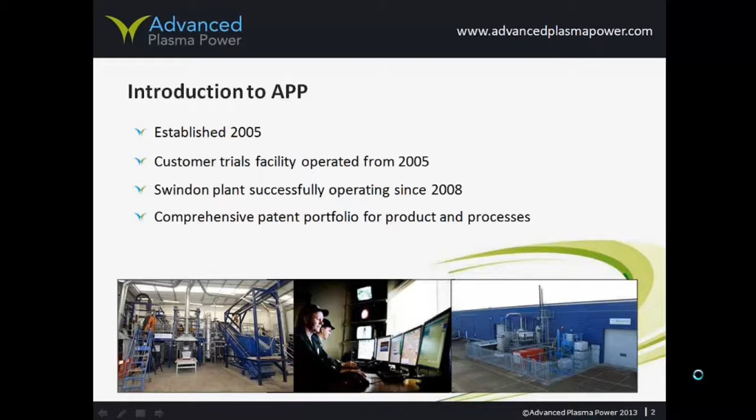Almost all industrial hydrogen used today is produced by reforming natural gas. Now, despite there being vast natural gas reserves around the world, there are many uncertainties over supply and prices. This is particularly the case for those countries with little or no natural gas reserves of their own.

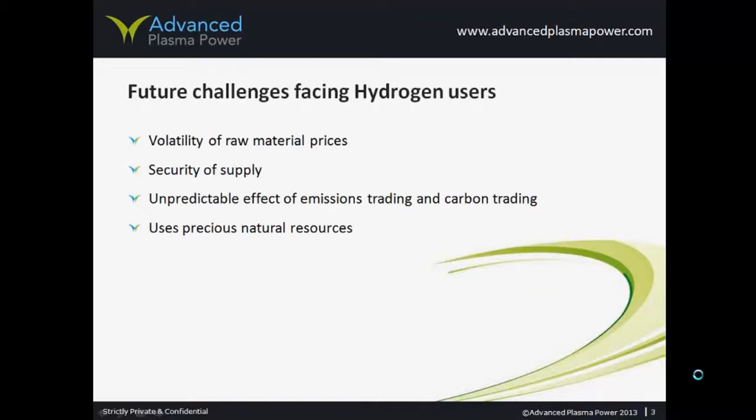For this reason, it's important that industrial users of natural gas and hydrogen explore alternative sources of gas with more predictable futures. In the next few slides, we're going to look a little bit deeper at the factors affecting the supply of natural gas.

Up to 95% of current hydrogen production is derived from fossil fuels, and most of this is from the reforming of natural gas. Natural gas is also used in the industry for direct heat, as well as being a precursor for other important chemical compounds such as ammonia for fertilizer and the processing of crude oil.

With the increasing demands for electricity and the reduction of use of nuclear power in some countries, natural gas is also seen as the quickest, cheapest and cleanest way of building new power stations.

Most experts in fact expect that the global cost of natural gas is going to go up, at least in the short and medium terms.

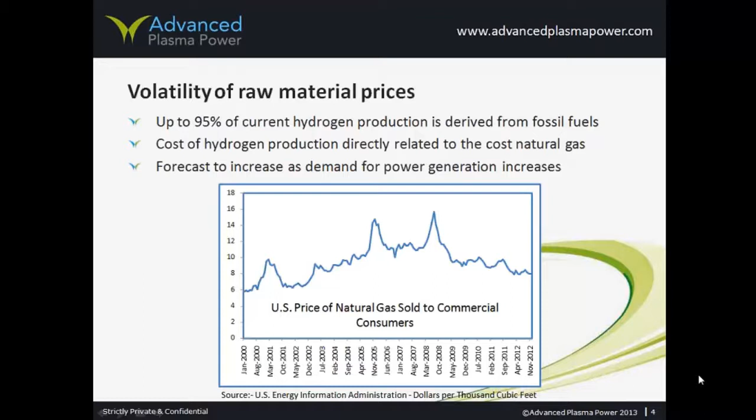The price of natural gas can also vary greatly between different countries and regions, depending on whether a country has gas reserves or access to reliable reserves that can be transported economically. With so many key sectors depending on natural gas, such as petrochemicals, the manufacturing industry, power generation, agriculture, and of course ourselves to heat our own homes, the demand for gas is likely to stay high for the foreseeable future.

Now, whilst the world as a whole has plenty of gas reserves, they are not all economically accessible. And as can be seen on this slide, the vast majority of proven conventional gas reserves are controlled by a small number of regions. Some of these regions have countries that could be considered to have volatile political structures, and there could be major changes in the next 15 years or so in the landscape. These changes could add further uncertainty to the market and risk the companies that depend on gas.

There are also potentially a lot of unconventional reserves like shale gas, but it is likely to be 5 years or more before many of these can be developed.

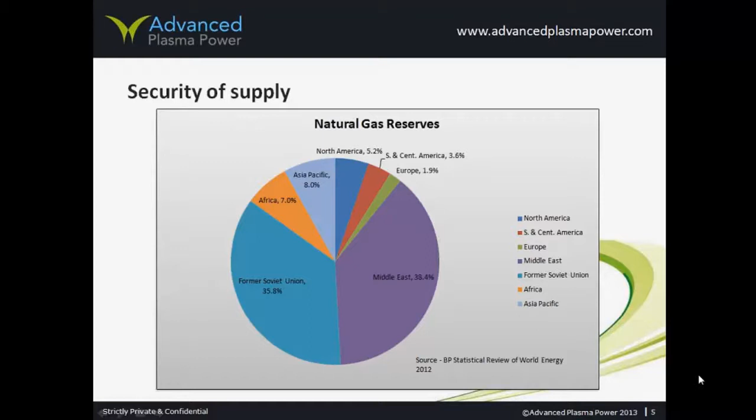Transporting gas to consumers is also a challenge. Pipelines are the most efficient method, but they can take a long time to build and only have a certain capacity. As has been seen over the last few years, pipelines can also be turned off from time to time.

When the tap was turned off to Ukraine a few years ago, there was a lot of panic in the gas markets and a lot of uncertainty.

At the moment in Europe, several planned pipelines have been put on hold or cancelled altogether. This map, despite its poor quality, shows the current major pipelines as well as some of the planned ones that have been cancelled.

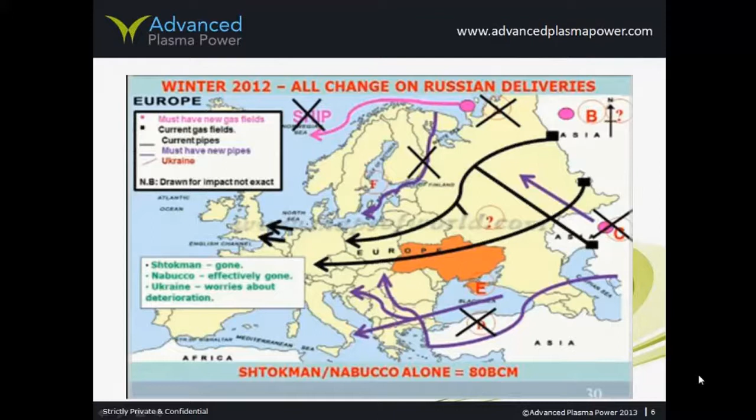There are many experts in the field predicting gas supplies in Western Europe could be very, very tight over the next 10 years or so. Many people on this call are outside of Europe, so you will know if this kind of situation is also affecting your region. The other method of transportation is by ship, but this is quite expensive and there is a long lead time on new terminals.

The other factor to consider is emission trading and carbon credits. The future effect of emissions trading and carbon taxes are also difficult to predict.

Europe has probably the most comprehensive emissions trading system at the moment, but other countries are also developing them, and the United Nations also has a scheme.

In Europe, the current allowances are higher than they were expected to be due to the economic slowdown, so the scheme has not bitten as hard as we might have expected. Not yet, anyway. The system is currently being reviewed, and there are various predictions on how the price of carbon credits will develop over the next decade or so.

This chart is used by the UK government as their best guess, and if it's right, the price could be around €20 within 10 years or so. €20 is actually what the EU would like the price to be now, so it's likely to be their minimum target and their target for legislation.

In terms of gas being used for power generation, this would mean an increase of around 20%, or about €4 per megawatt. For chemical production, like ammonia for example, it could actually be much more.

All of these factors mean that the supply and pricing of gas over the next decade or so is highly unpredictable. Any prudent company that depends on natural gas as a source of heating or raw material should explore alternative, less volatile sources to reduce its exposure to these risks.

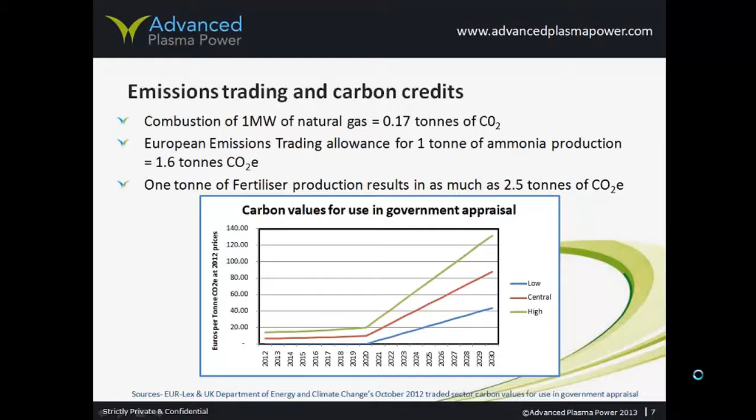Set against the pressures in relation to natural gas is a further global challenge in relation to waste management, which we face around the world.

As population increases, consumption increases through a burgeoning middle class, our waste problem is getting bigger. Set against this is a decline in the acceptability of landfill as a solution to our waste management challenges, with incineration becoming increasingly unpopular and challenging to obtain planning permissions and building consents.

Whilst at the same time our natural resources are in decline, any modern waste management solution needs to embrace the shift from waste management to resource management, which is where our solution can play an important role.

A second major challenge is the need to decarbonize and to produce energy and fuel sources from lower carbon sources in a cost-effective way.

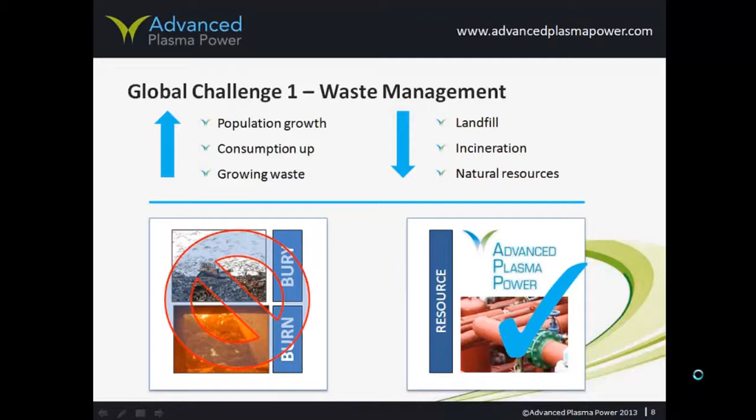Our Gasplasma process is the combination of established and proven process equipment configured in a novel and new way.

First of all, we feed prepared feedstock, which has had recyclates removed, in particular metals, both ferrous and non-ferrous, glass, and also dense plastics, which have a value as a recyclate, leaving a residual feedstock with a relatively high biomass content.

This is fed into a conventional fluidized bed gasifier, where the gasifier effectively is the workhorse in transforming this solid material into a crude or dirty syngas containing relatively elevated levels of condensable tars.

This gas, as well as the residue from the gasification process, the ash, are passed into a secondary plasma stage, which is none other than a refractory lined vessel with an electric arc which is struck from a graphite electrode to the base of the vessel to create a very clean source of heat, but also of UV light.

This plasma stage is very effective at cracking the tars in the organics in the syngas, as well as vitrifying or melting the inorganic component within the ash into a solid material which we have called Plasmarok. I'll say a little bit more about Plasmarok in the subsequent slides.

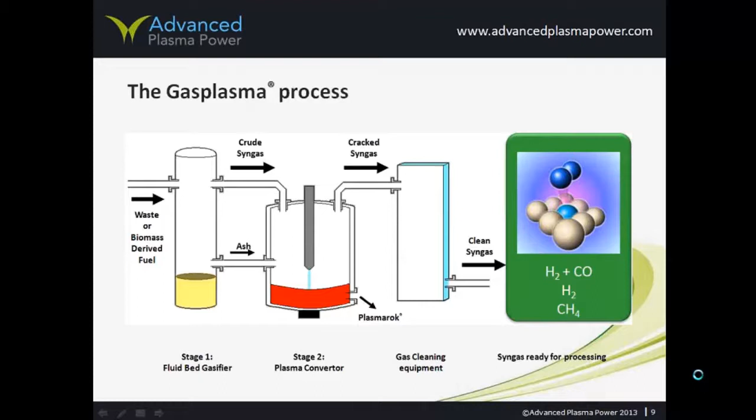This next slide really encapsulates very nicely the effect of the plasma cracking stage. The sampling points on the left of the slide is of the gas exiting the gasifier. These are samples actually taken from our plant in Swindon, but can be samples from any gasifier operating on a waste feedstock. You can see relatively elevated levels.

Here we have measured for toluene, hexane and phenol, and we also measure for benzene, which is a particularly refractory organic. The levels are reasonably elevated.

If this gas were, for instance, fed into a gas engine or turbine, the equipment would foul very quickly. By passing it through the plasma treatment stage, you can see on the right-hand side of the slide, we have again sampled for toluene, hexane and phenol, and the levels of those species are barely detectable. This makes our gas plasma process an ideal solution for producing a clean syngas from waste feedstocks.

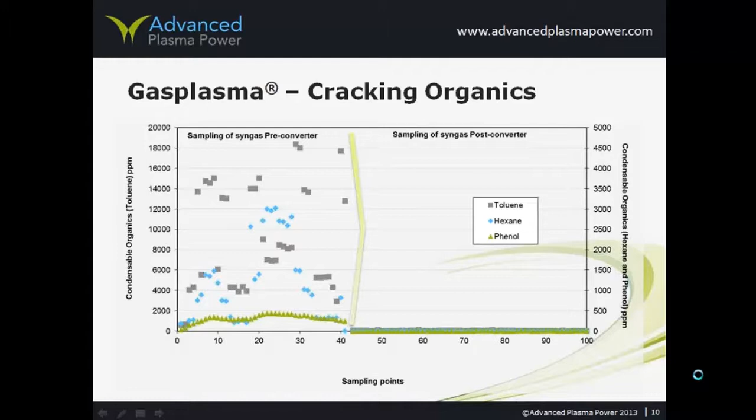I'll hand back over to Simon to talk about the further downstream processing of the gas.

Thank you, Rolf. This slide shows a comparison between the production of syngas compared to natural gas. As Rolf said, after cooling the syngas, it is then cleaned using standard dry filters and wet scrubbing to remove any remaining fine particulates, acidic gases and heavy metal vapors. Then the syngas is ready to be used.

This slide also gives an insight into the basic economics of the process. Natural gas is effectively free of charge while it is in the ground, but then has cost associated with it as it is removed from the ground and transported to where it is to be consumed.

The raw material for the gas plasma process often has a negative cost. In other words, the plant would be paid to take it. This of course varies according to the location of the plant and the type of waste, but it can be a very significant part of the cost effectiveness of the plant as a whole, as we will explore later.

Also, the concept is that the plant will be located very close to the point of consumption. Ideally, transport would be via a very short pipeline, so transport costs are eliminated.

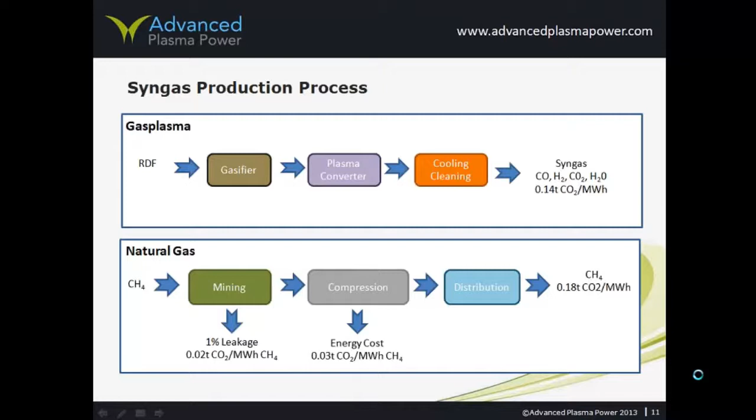This slide shows the typical composition of the syngas. It will vary a little depending on the type of waste being processed. However, in all cases, hydrogen and carbon monoxide form the largest constituents. The ratio is roughly 1:1, depending on the nature of the waste stream.

This can be changed using the water-gas shift reaction to increase the hydrogen content. There may also be a very small amount of sulfur compounds, chlorine compounds, and ammonia present, but these can be cleaned further depending on the requirements of the downstream process.

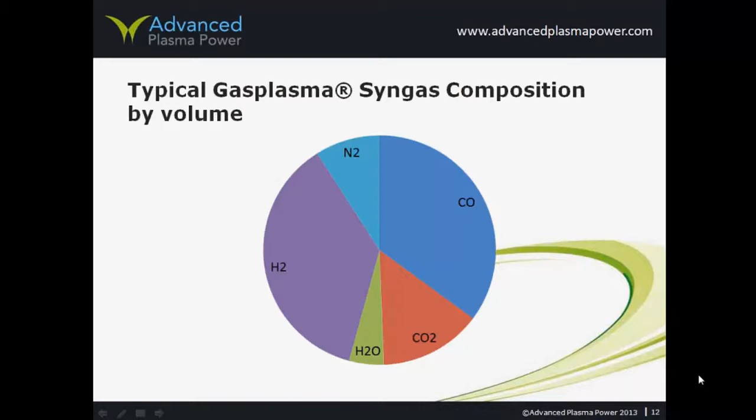This slide compares our syngas with natural gas. It is slightly denser, but still lighter than air. Syngas has a lower CV than natural gas, so for direct heating applications you need more syngas and more burners.

Although syngas has a lower CV than natural gas, the Gasplasma process has been designed to maximise the CV, and we are confident that our syngas retains the highest CV of any waste-to-syngas process. An example of this is that we use oxygen and steam in our fluid bed gasifier. This dramatically reduces the volume of nitrogen in the syngas compared to gasifiers that just use air. And it probably goes without saying that, like natural gas, combustion results in CO2 and H2O.

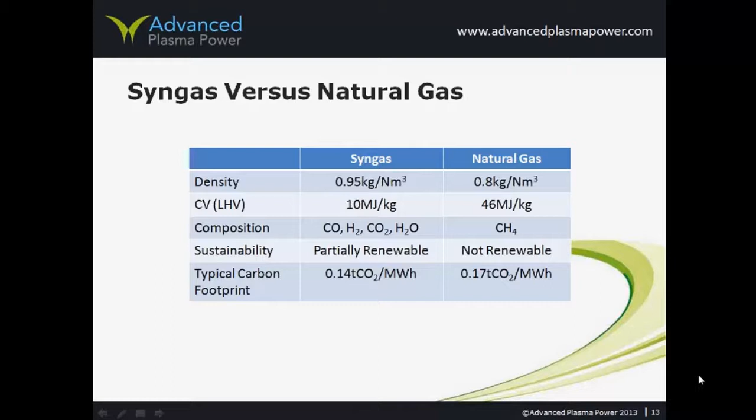Moving to the carbon footprint, burning our syngas has a lower carbon footprint than natural gas. This is in addition to the carbon benefits of diverting waste from landfill, which are considerable. Many landfills are emitting methane, which attracts a very high carbon tax in some countries. In fact, within the European emissions trading scheme, carbon emissions from waste are actually carbon tax-free.

This slide shows some typical uses for our syngas. Simpler chemicals like hydrogen, methanol and methane can be produced using the water-gas shift reaction and then catalytic conversion in the case of methanol and methane. Fischer-Tropsch can be used to produce more complex hydrocarbons such as diesel and kerosene. And ethanol can be produced by using the fermentation processes that are now becoming available.

And of course, energy can be generated either by direct combustion or by running a gas engine or turbine directly on the syngas, as Rolf mentioned earlier. In fact, we're the only company that we're aware of who has demonstrated the operation of a gas engine on our syngas over a prolonged period. We've been doing this for the last 5 years here in Swindon, and this demonstrates how clean our syngas is.

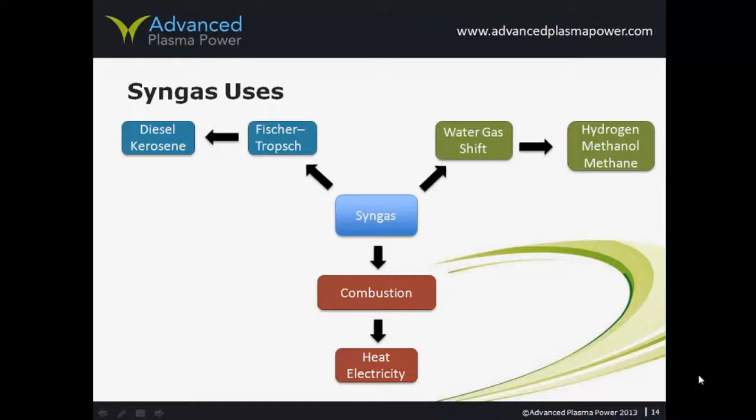Syngas is a good alternative for natural gas where a process requires direct heating. The energy density is lower, as I mentioned earlier, and this needs to be considered when specifying burners. However, there are potentially large savings on the carbon footprint.

The direct heating application will depend on local economies and local economics. If there are reasonable gate fees for waste disposal, and the local cost of gas is relatively high, or there are green incentives available, it would certainly be worth exploring the potential for using syngas in your process.

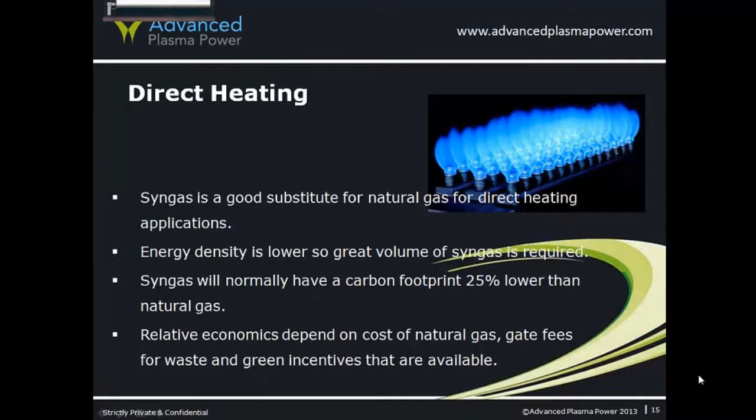If your process requires hydrogen, then syngas is likely to be a highly cost-effective and sustainable source for your plant. First of all, there is no need for the high energy cost associated with steam reformation. The raw material cost of producing syngas will depend on local conditions, as I mentioned a moment ago, and the cost or negative cost of the feedstock.

However, we can say that the cost of converting syngas to hydrogen is definitely lower than the cost of converting natural gas into hydrogen. This means that in many cases the overall cost of using a Gasplasma plant to generate hydrogen will be significantly lower and more predictable than the cost of using natural gas and steam reformation. Even more so if you consider the carbon credit benefits.

We're not suggesting that you should get all of your hydrogen this way, but if a substantial proportion came from alternative sources such as waste materials, your company's exposure to the fluctuations of the gas market could be dramatically reduced. I'm now going to hand over to Rolf, who's going to talk a little bit more about the technology.

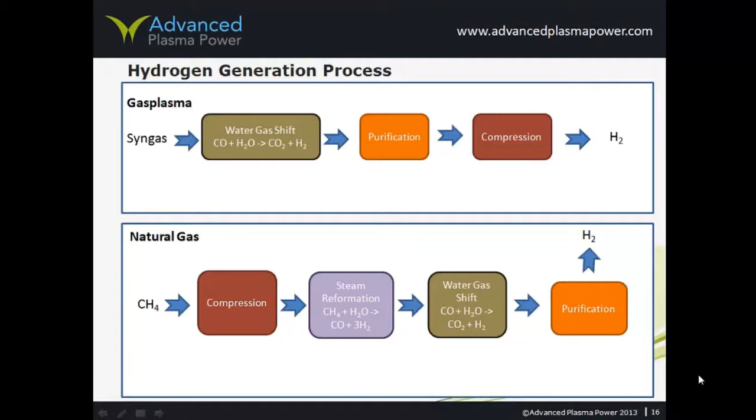The majority of those gasifiers operate on coal and petroleum, but a growing number on biomass and waste feedstocks. They have been operating for decades with high availability. In our own particular case, we have selected a fluidized bed system supplied by Outotec USA, formerly Energy Products of Idaho, with over 100 fluidized bed systems operating globally.

Our plasma system is supplied by global plasma leader Tetronics, our sister company, established nearly 50 years ago and having supplied in the order of 80 systems globally. Again, these have been operating for many decades on a variety of different feedstocks for different applications.

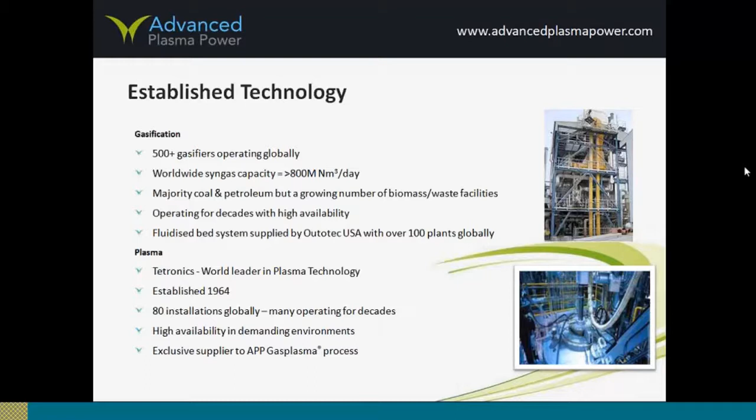The next slide really summarizes the closed loop nature of our proposition. As I mentioned, the first step after waste collection, which we are not involved in, is to separate recyclable materials from the waste feedstock to produce a pre-prepared fuel with a relatively high biomass content. The recyclates, in particular the metals, the glass and dense plastics, are recycled back into industry and the economy to create a circular economy.

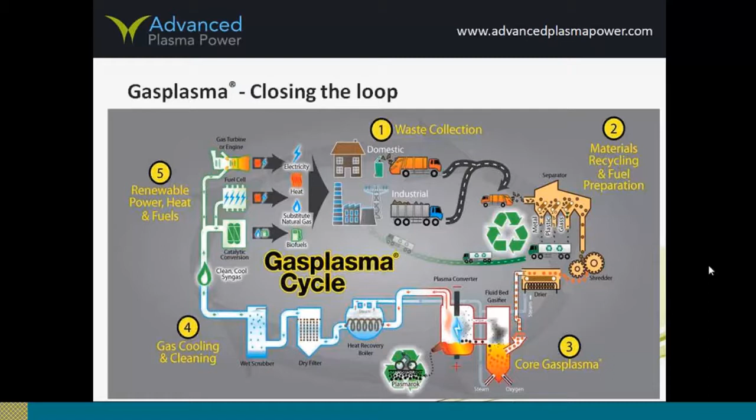I said that I'd talk a little bit about the other output. We focused obviously on the syngas, which is the main point for discussion today. But the solid output, which we have called Plasmarok, is a vitrified material, an aluminosilicate in the main. It is extremely strong and hard, quite dense, very low leaching.

The blue, barely detectable bars are the leachate results from our testing, the values in many cases several orders of magnitude below the inert waste acceptance criteria. In the UK, we have gone through the protocol to establish this material as a product with the Environment Agency and not a waste. We therefore have no wastes resulting from our process, with the exception of a very small amount of gas cleaning residues, which in themselves can also be further processed.

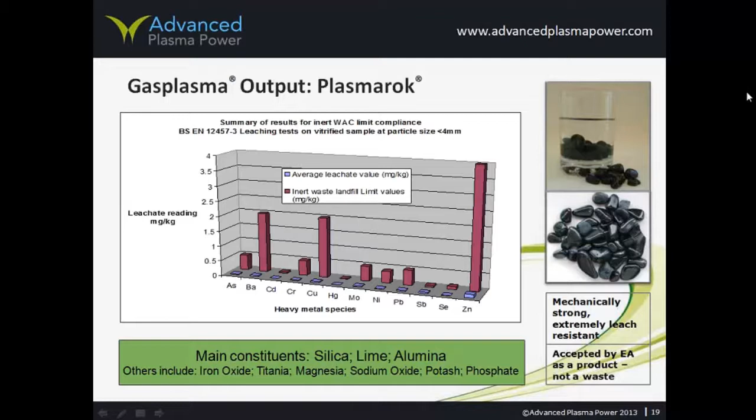The raw materials for our process on the input side can be all manner of different organic materials, from municipal waste to commercial, industrial waste, more hazardous materials such as sludges, as well as waste products from biomass production and agriculture.

Municipal solid waste and industrial waste will usually be at a negative cost, which means that you will be paid, your plant will be paid to take the material on a long-term supply agreement basis.

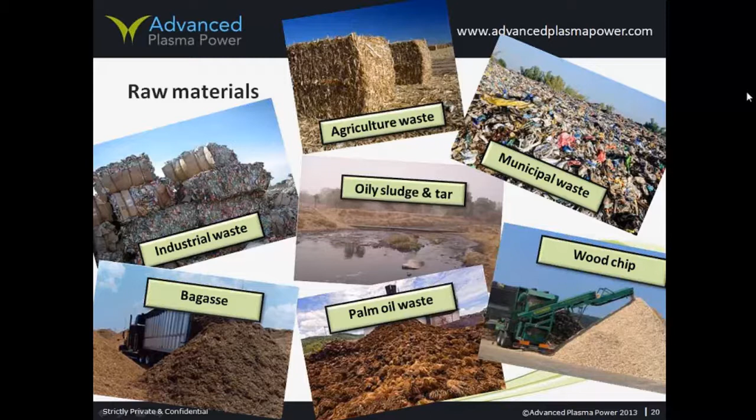We have undertaken some analysis of the forward price curve for various fuels, and Simon has talked very eloquently about the pressures on natural gas pricing as we move forward, with a general prediction of an increasing price over time. The trend in relation to other fuels is similar, in particular oil. Coal is perhaps the most abundant fossil fuel in a slightly different category, but is of course an extremely high carbon emitter.